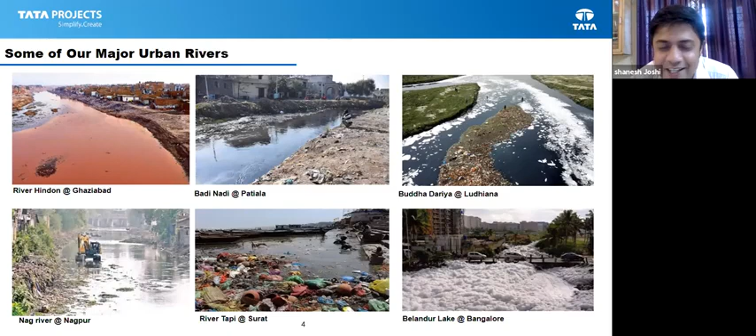Mind you, we have not put one photo of one river and just changed the titles. These are all different rivers, but yes, they are all the same in character, so they look all the same. They are full of solid waste dumps, heavily silted with sand and hyacinth. You can see a good amount of unorganized, undeveloped areas on the banks of rivers.

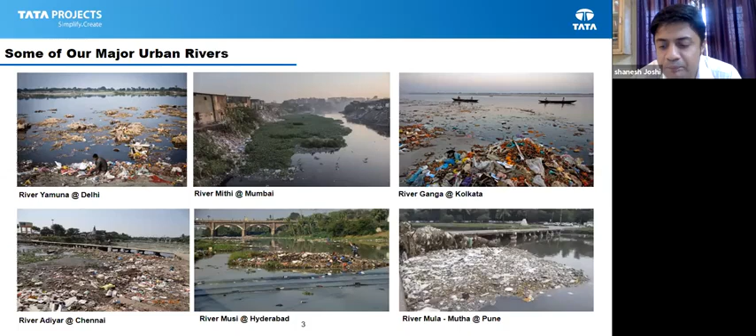So we have clearly not managed our rivers very well in the country. And this is high time we should give due attention to these, because there are major risks that we are carrying today in our lives. The most important risk is the pollution of surface water and groundwater. When we are dumping so much solid waste, or not managing wastewater properly, a lot of industrial and domestic wastewater without treatment is going into these rivers.

Definitely, we are creating very harmful, unhygienic conditions. We are prone to waterborne diseases, because this water, not only surface water, but it trickles down into the groundwater and spoils the clean groundwater. Then these are typically mosquito breeding fields, so you will suddenly see a surge of dengue and malaria in urban centers quite often whenever it rains and the water stagnates. So it's a major risk.

The second risk is of flooding. I come from Hyderabad, I'm based out of Hyderabad, and the last 10 to 15 days were really horrible. We saw a very concerning situation because the rainfall happened - it was not very heavy, it was moderate rainfall I would say. But still we had so much issue because the Musi River is fully encroached. There is no buffer zone left, and the water could not actually pass through the river, and the entire city was flooded.

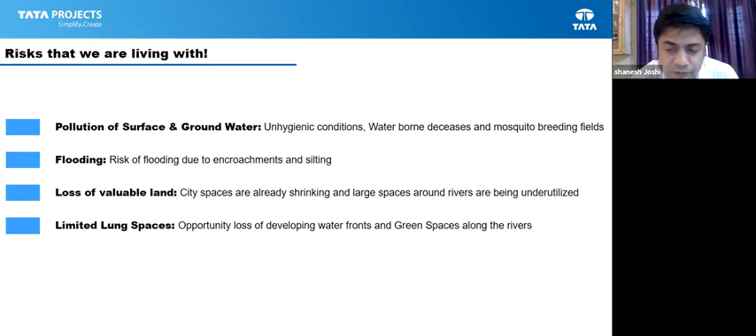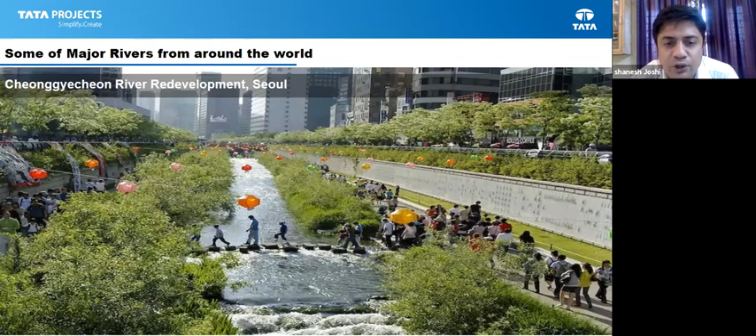As I was saying, when we entered into the environment business, we realized it's time that we should, as Tatas, which is a very socially oriented group where we look after the social needs and try to address them, we realized we need to have our urban rivers go through a major transformation. We actually started working on developing rivers around the country. We identified several rivers, and got very good support from the government of Rajasthan and the central government, who accepted that we were willing to take up this challenge of transforming a nala into a river, and they supported us.

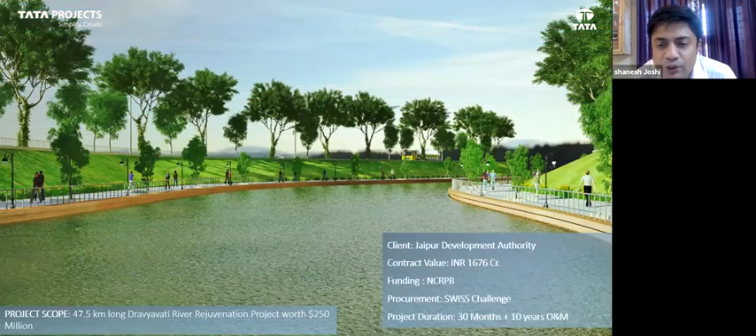The development agency was Jaipur Development Authority. The total cost of this project was 1,676 crores. It was funded by the National Capital Region Planning Board, a central government entity which funds such unique projects. The entire project was completed in 30 months. We started in March 2016, and on 2nd October 2018, this project was inaugurated for the public.

After flowing for about 47 kilometers, it meets a river called Dhund River. Now ironically, you would have heard about the Namami Gange program, where we are trying to rejuvenate our holy river Ganga. You would be surprised - we are miles away in Jaipur, very far from Ganga, but this project actually also helped in cleaning Ganga.

How? I would tell you - this is a tributary of Dhund River. So water from this goes into Dhund. From Dhund it goes into another river, from there to Chambal. Chambal goes into Yamuna, and Yamuna finally ends up in Ganga. So our small effort of creating a good water body here in Jaipur has also benefited River Ganga.

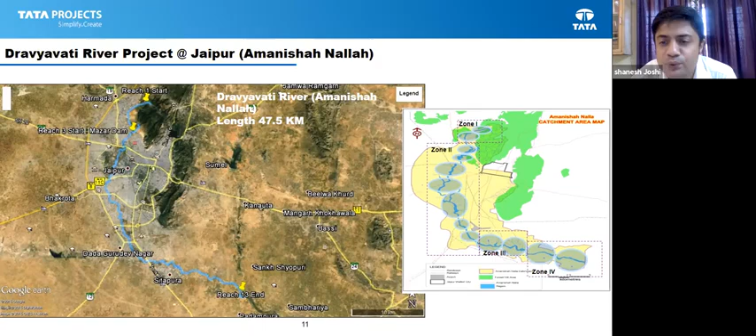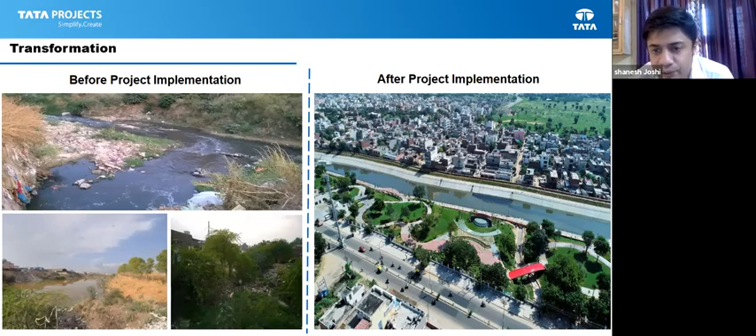What we have done is channelize the river. When you channelize it and maintain it well, you get a good amount of land that comes out of it, where you can plan either public space or commercial space. You can see very beautiful parks have been created - there are walkways, cycle tracks, open air theaters and more. Almost 72 hectares of land has been reclaimed, which they have now started monetizing. They are going to sell this land for commercial purposes, and I'll show you some economics of doing this project in subsequent slides.

It was a very uphill task, not easy, because whatever we have done to our rivers, it's going to take a lot more to bring it back to its original form. A huge amount of concreting was done. We don't normally recommend concreting, but this was necessary because Jaipur has flash floods, and to manage that velocity of water we had to line this channel in certain sections. It's not completely concrete lined - somewhere it's natural, somewhere stone pitched, but wherever there was a velocity or flooding issue, we had to line it.

Almost 99 lakh cubic meters of earthwork was done, 17,000 trees were planted, and 2 lakh 16,000 square meters of grass turfing. So a lot of work has gone into bringing this river back to its original form, and obviously a lot of money was spent.

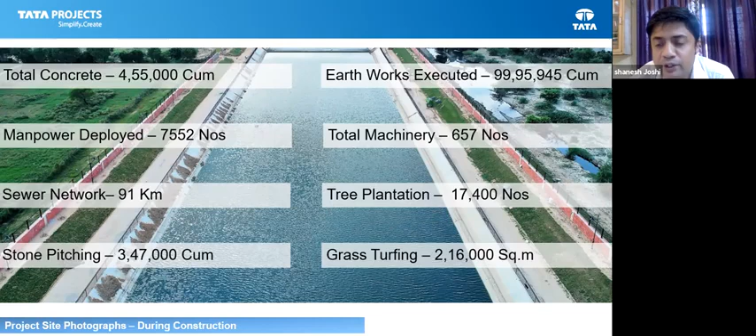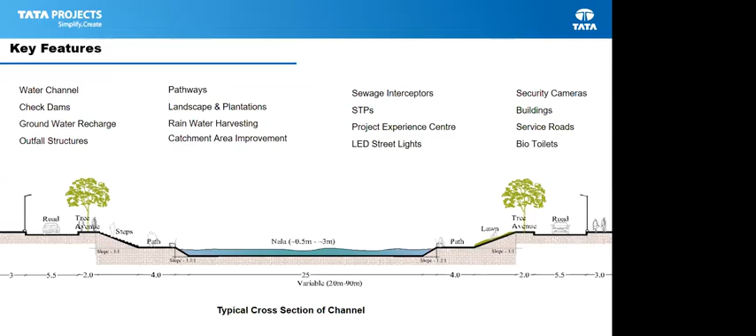Key features - what we envisaged at that point of time was to have good public space. With a 47-kilometer length of right of way, it gives ample opportunity to create pathways, walking tracks, cycle tracks. We also had sewage treatment plants, because we needed very clean water going into these rivers. We'll talk more about all the features that have gone into the project when Mr. Santosh takes us through that.

Some of these pictures are a bit old, but I think we can see how this entire space has transformed.

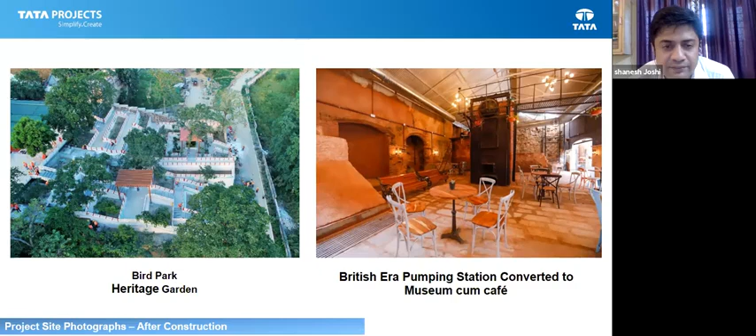While we were working on it, we found a British era pumping station which was not even noticed before. We have created a beautiful museum out of it, and there is a cafe that has been built. A lot of people come and visit this cafe now. There is a bird park, there is a heritage garden, so a good amount of green space, since Jaipur is typically desert, people are not really used to seeing so much water and greenery there.

But now, I think with this project, the entire skyline and landscape of Jaipur city has changed. We have also constructed a project experience center. So those who happen to visit Jaipur, I would definitely recommend you please visit the project experience center.

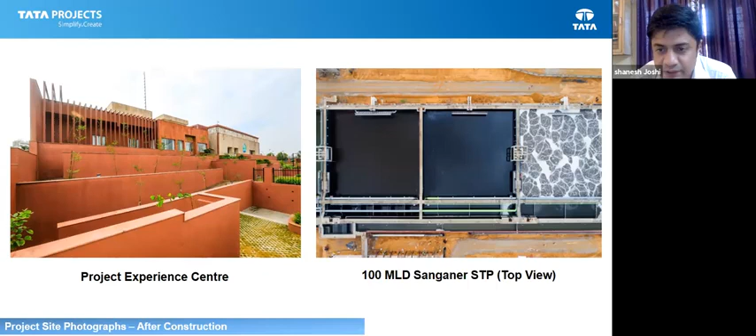You will get to understand how this project was conceptualized and delivered. We got a lot of appreciation. Our honorable Prime Minister has congratulated us. Our Vice President has taken an aerial view of when this was being developed. We have got several awards.

So this is typically a people's project. I think for any such project, because we are the ones who have actually spoiled these rivers, we should take accountability individually. Each one of us should take accountability that yes, we have spoiled the rivers, and we should again take responsibility of cleaning it.

So all these projects are people's projects. We have gone through this people cycle very well in the last 4-5 years, where we had stakeholder engagement, people engagement. We told them why this project is important and why it should be done, how they are going to benefit. We organized school picnics, and a lot of students, young minds came and saw the experience center. They realized, yes, we have not done the correct thing, and it's time that we should correct it. They were actually very happy to be part of this particular project.

So what was the value that has been created? The first and foremost is health. We have improved air, water, and land quality by doing this project, which is going to benefit not only the river area, but the entire river zone and the people staying in and around that zone.

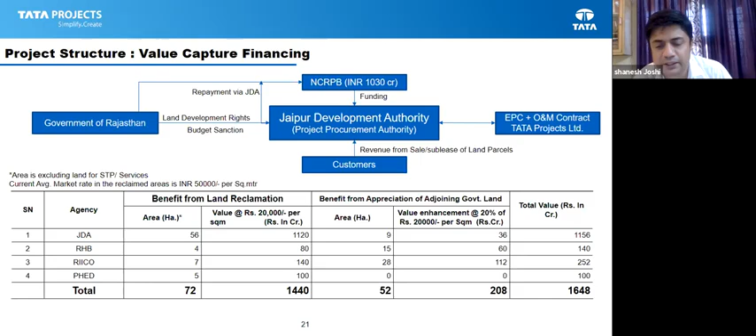Even with conservative numbers, such a project, once fully developed, can contribute to paying back all the loans that governments would be willing to take. So it's a very healthy river hygiene project, and I think we should all be proud of it. Since we have worked on this, we have learned the tricks of the trade, and we have understood how this can be done.

Sabarmati was a project done in Gujarat, which I think you all would be familiar with. It was very rightfully highlighted by our Honorable Prime Minister. But typically, I would say that is a river development project, not a river rejuvenation project, because they had a good source of water from Narmada, and they wanted to transfer that water into their irrigation channels. So they used Sabarmati as the water channel. They had a good source of clean water with them, and managed to do development around those areas very nicely.

But if we talk about river rejuvenation, this is what and how it needs to be done. So I think I have covered the points I had to share with you all. I hope this has given you a perspective of how these rivers are important in our lives, and how each one of us can contribute in developing these rivers.

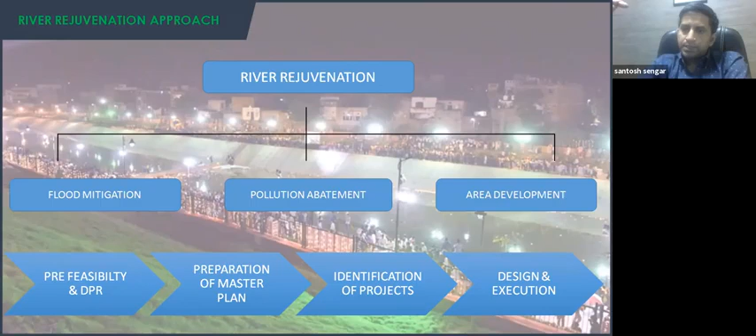In terms of how we go about the whole river rejuvenation process: first is pre-feasibility and detailed project report, the DPR. After the DPR is formed, we prepare the master plan. Once the master plan is prepared, we identify certain projects for execution, then design and execute those projects. I'll explain the Dravyavati river project to show how we go about river rejuvenation, which we've subsequently done for many other rivers.

To understand the Dravyavati project, we need to understand how this river was closely. As Mr. Shanesh told, this river was historically known as Dravyavati, but later the Dargah of Amanishah was established during the Mughal period on the northern edge of this water stream. During that period, Jaipur was a very small fortified town located west of this water stream. Since then, people started calling it Amanishah Nallah, and eventually it turned into a Nala with a very degraded state.

It had lots of sewage flowing into it, solid waste was deposited all around the river - generally a degenerated ecological environment. There was slumming along the edges, encroachment at many places where there was hardly enough space for that water to flow out. The length of the river is quite huge, 47.5 kilometers, and the most important thing is that the gradient from start to end of the river was 150 meters. That's the reason concretization was done for the river, just to carry that flow, because the slopes were heavy - it was a major engineering challenge.

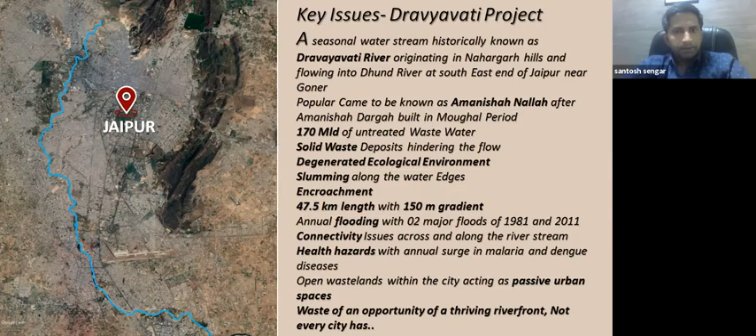I will not go into detail of pollution abatement, but I'll briefly describe. These are basically 3 or 4 parts. Not necessarily have we done all of it in this project, but gradually we have refined this process. The first part is screening of the solid waste, then we go for sewage interception and treatment through sewage treatment plants.

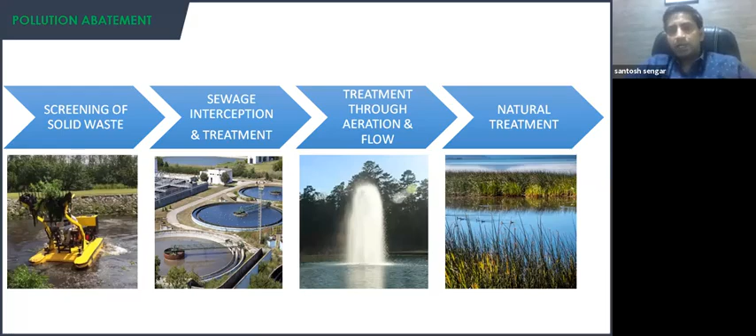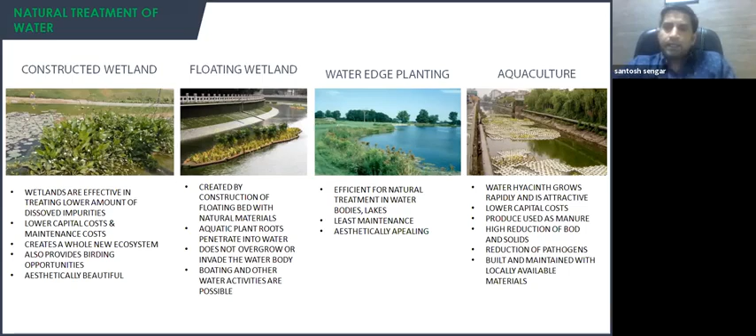There's an aeration technology where we create water fountains within the river stream for aeration of water. Then we can also go for natural treatment of water, like constructed wetlands, floating wetlands, water edge planting. We plant certain flora along the edges which will treat the water, and floating pods. In order to go ahead with this project, there were certain things we had.

We started with creating a vision, which was basically to create a vibrant and lively waterfront by complementing the character of the context, and by planning viable and attractive plazas and promenades to break the monotony of the stretch without affecting the hydraulics of the water body.

This vision carried everything when we started, and then we came out with certain objectives: to provide certain amenities and infrastructure like cycling infrastructure, creating public amenities like public toilets, creating a walkway, and connecting the greens located all along the river.

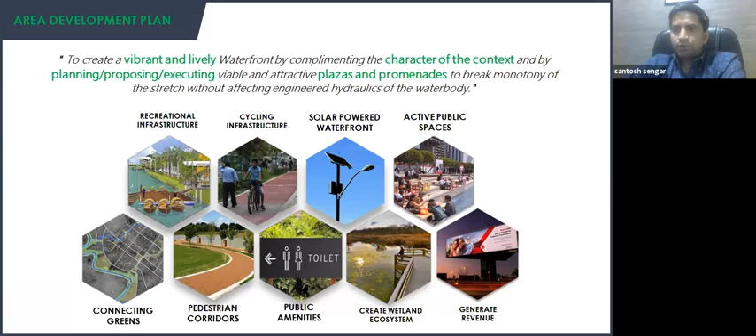In terms of explaining the whole project, I'll explain what were the major projects undertaken. The first part was the master planning of the project to begin with. A master plan for the whole project had to be prepared, which was a big challenge because the master plan for Jaipur was already in place, and in it this river was shown as a river zone without assigning any detailed land uses.

All the lands in the river zone were lying vacant because there were no development guidelines for those areas. Even if we do not talk about the river, those areas were lying vacant. So the first exercise in master planning was in terms of defining a project area.

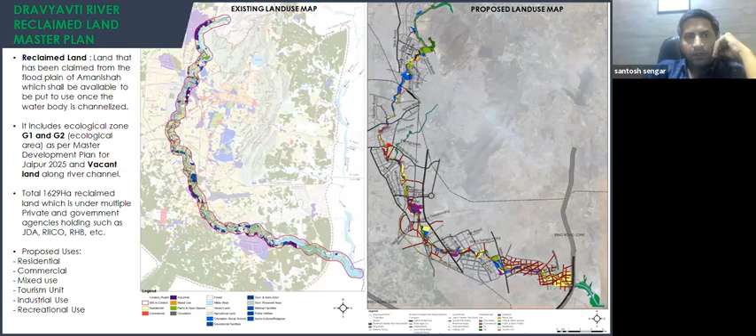When we talk about a river, it has a certain affected area or context area. To define that, we had to do certain exercises, so certain layers were taken into account. The first thing was the Geological Survey of India, from which we collected the river boundary.

The second layer was the master plan delineation of G1 and G2 areas, basically eco-sensitive areas marked by the master plan. Then there was a layer created of vacant land parcels and built-up areas.

Also, the vacant land parcels of government ownership lying immediately next to the river were taken into the project area. In case of river dams and all, where water was flooding beyond those areas, those areas were also taken into account. So that's how the project area was delineated.

On the left, you can see the basic components of the master plan which was prepared. First was the base map. Second was understanding the engineering aspects, which is very important. When doing a project like this, you need to understand the river hydraulics and the different activities proposed from the engineering point of view, and how they will come and affect your land uses.

First was the preparation of a conceptual plan. Then certain workshops were conducted for public involvement and all. Then a proposed land use mix was created, which we call the draft master plan. We'll not go into the details.

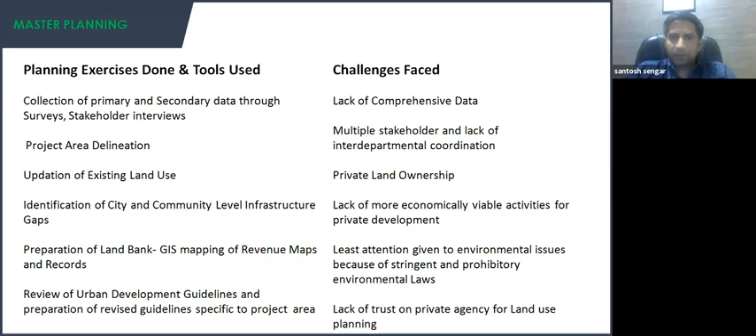Next, when a land use plan is prepared by a private agency, there is definitely a trust factor involved with the local body. So this is what we had faced during the master plan preparation. Though after the master plan, we had identified certain land uses, and we did the riverfront development.

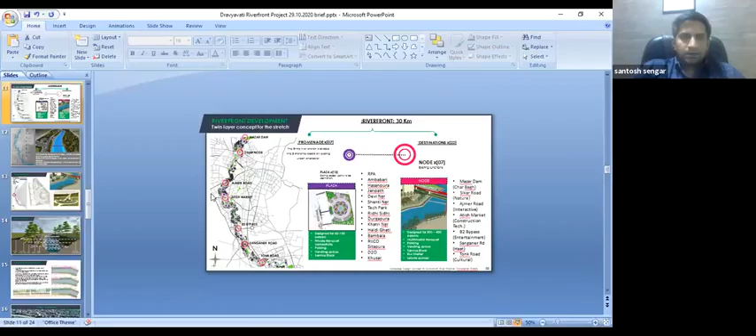So in the riverfront development of that 47.5 kilometer stretch, we identified 30 kilometers which was within the city limits as the riverfront development. And of that, we divided that stretch into certain destinations.

We had this long stretch which we had to design, and we wanted to break the monotony, so we decided to divide that whole stretch into promenade and destinations. By promenade we mean a linear stretch of river bank where facilities will be located, with cycle track and walkway, and there will be destinations which we have called nodes and plazas.

On the map on the left hand side, these are the locations of major nodes: Mazar Dam, Sikar Node, Ajmer Road, Atish Market, B2 Bypass, Sanganer Road, and Tonk Road.

In terms of explaining what these nodes and plazas are, if you're from an architecture background, in urban design there's a concept called a node where the urban character is changing. So we identified those areas where the urban character was changing, where a major transport node is available, transport connectivity is available, and places where people will access the river. Those points were called nodes.

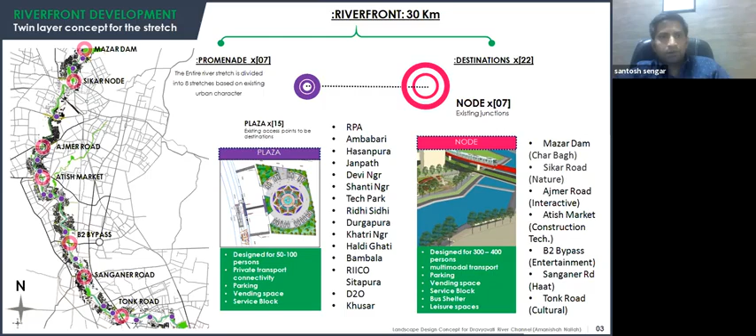In terms of giving them identities, this whole riverfront was designed and themed on celestial bodies.

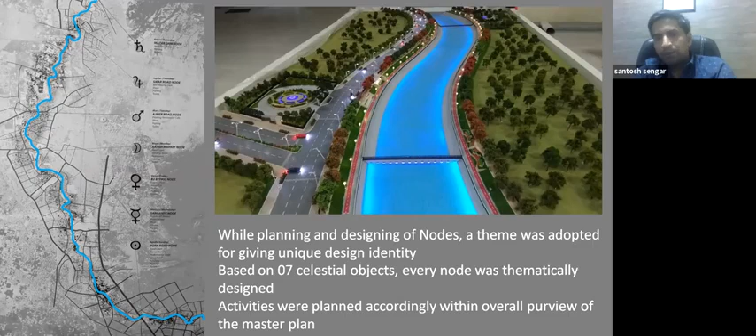This is one example of a node, which is Atish Market node. There were riverfront restaurants provided, a sundial was proposed, public toilets were proposed, and vending spaces were provided. This was located near a metro station where connectivity from all other places was provided, and a river crossing was provided.

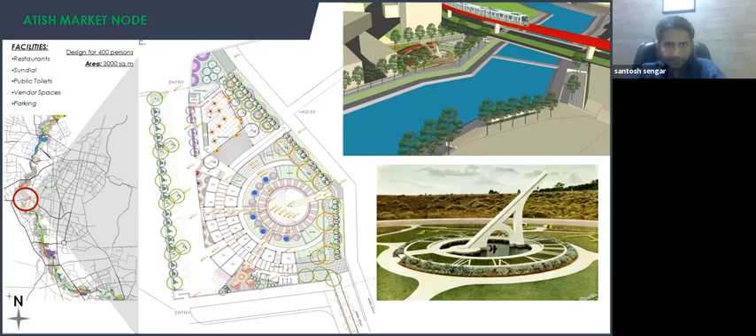In terms of explaining the typical river section, which I've called a promenade, it was designed keeping in mind the engineering aspects of the river design, the hydraulics. This is one typical section, not necessarily the only section for the riverfront development, but this is designed for different flood levels.

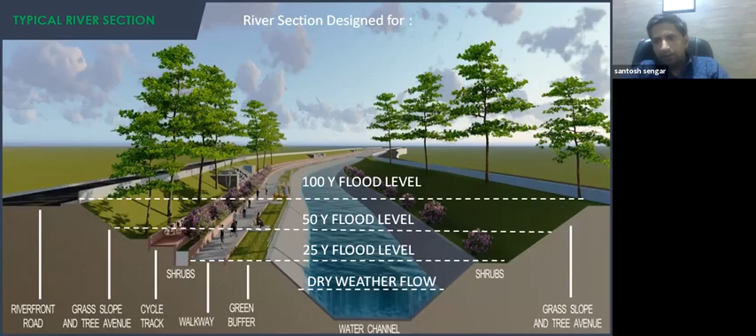All your amenities like sit-outs, toilets, and so on are provided at the 50-year flood level within the river right of way.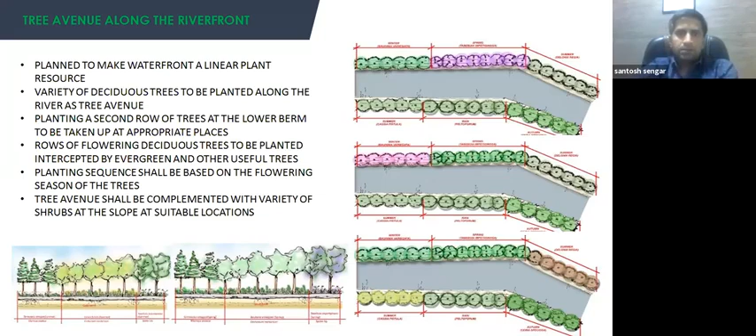In terms of the tree avenue, which is the plantation of trees all along the river edge, it was planned as a linear plant resource where a variety of different trees were provided, and there was a pattern where flowering was arranged in a manner so that at every point of time there will be flowering in a certain stretch along the water edge.

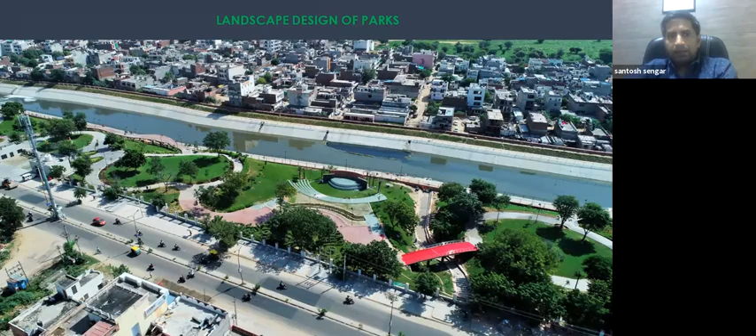So I'll go for the landscape design of different parks. There were three major city-level parks designed within the project. One of them was the bird park, the Sikar Road Bird Park. This site was basically the site of an old dam created in 1853.

There was a broken wall, and there was a small wetland located just off the Amanisha Nala. The idea was to create a space to conserve that wetland where we can go out for natural activities. Bird watching decks were created. This was the place where a colonial period pump house was located, which was identified and restored as a waterworks museum and cafe.

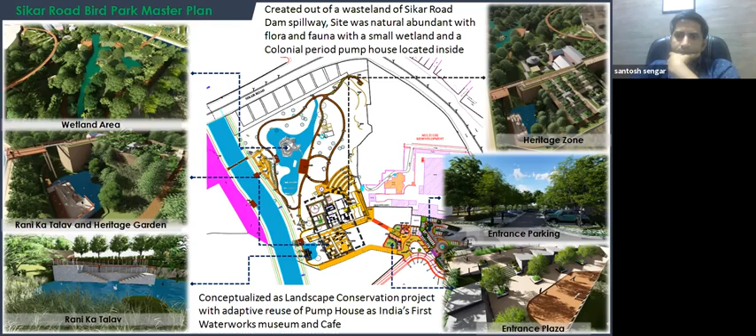Within this project, a wetland area was designed. A recreational water pool was designed, called Rani Ka Talav, to relate it to the general public. And these are the entry areas and parking. So there's a 3D view of that park.

Second was the botanical garden. In terms of explaining why this theme was given to the park, there's a city-level park themed as a botanical garden.

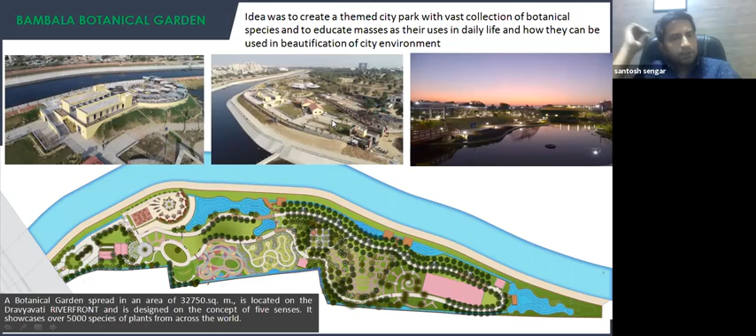These are different pictures. On the top left, there's the cafe provided within the park, and one aerial view. These are pictures from when it was under construction. If you go today, it looks even more beautiful.

Next is the project experience center. This was one important component of the project in terms of public participation, because around 50% of the land was in private ownership, and land acquisition was not possible.

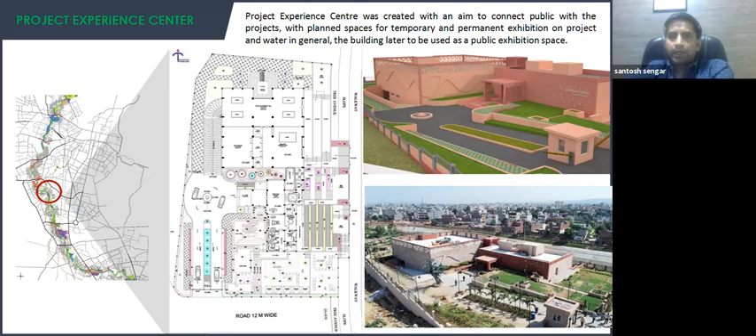The Land Acquisition Act 2013 was still on hold, so land acquisition was not possible. In terms of getting this project executed, we had to convince the general public of the importance of the project. So the Project Experience Center, PEC, was planned in order to educate people on how this project would help the city or the general masses, and it actually helped people understand why this project is so important. Here's the picture of this Project Experience Center building.

A model was created for Jaipur city in context of the Dravyavati river, so that people living along the river could go and identify their houses with reference to the river. A detailed map of Jaipur city was created, which is still there in the project experience center.

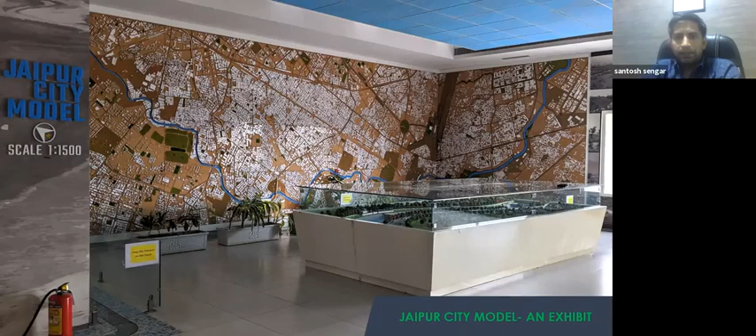By explaining all these slides, this was an exercise that had different aspects - urban planning, landscape design, urban design involved. We had to do a lot of work, from land use planning down to the details of the project experience center design. It involved a different approach.

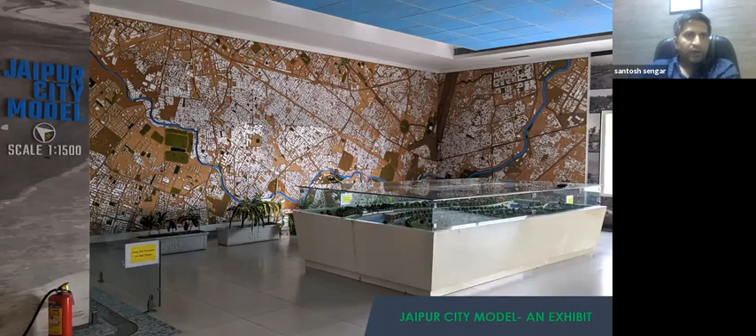To conclude, I'll talk about what lessons we learned for riverfront approach. First, in planning, we need to consider a nature-first approach. For example, when master plans are prepared, rivers and water bodies are generally marked as eco-sensitive areas, but further detailing is not done. We need to take them on priority while planning.

We need to change our approach from socio-economic to socio-natural. When we do our planning, we consider a lot of socio-economic aspects, but we need to shift from economic to natural aspects. We need to conserve our water bodies and natural resources in the long term.

We need to have more public participation in the projects. For example, for Jaipur, we were lucky that this project was executed despite having so much private stake, but for such projects to be successful, we need more public participation.

Greening the neighborhoods - by greening the neighborhood, we need to connect all cross linkages of green spaces. In this project, we tried to create a linear green spine through the city, but we can also try to connect green spaces located across the rivers. In this particular project, we did river channelization.

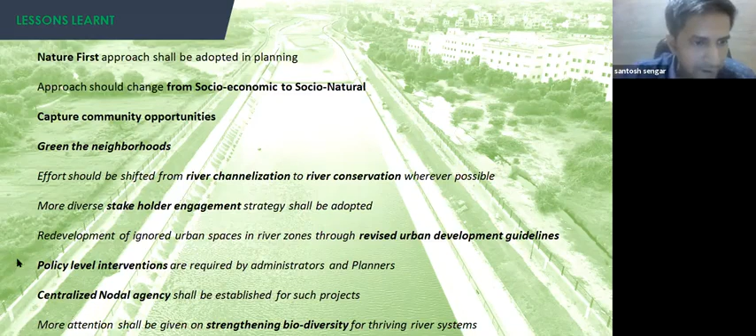Thank you, Santosh, for giving that wonderful insight on the planning part. I'm feeling a little bit thirsty, so I'm having trouble speaking. I'll just get some water.

The biggest lesson that we have learned is that while this seems to be an engineering project—I'm an engineer by profession, and we always thought these are engineering projects where we are talking about hydrology, treatment, getting clean water, etc.—I think these projects are very important from an architecture and planning point of view. I think that is how the need is established.

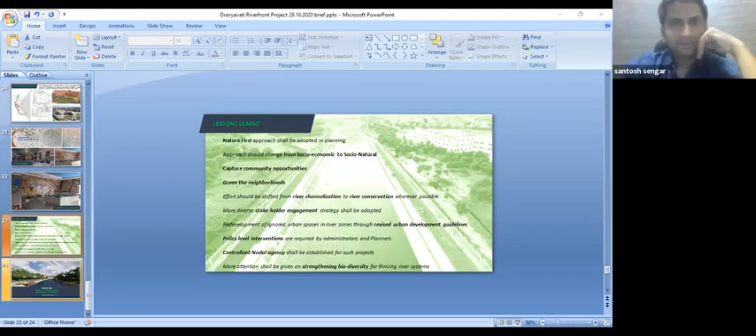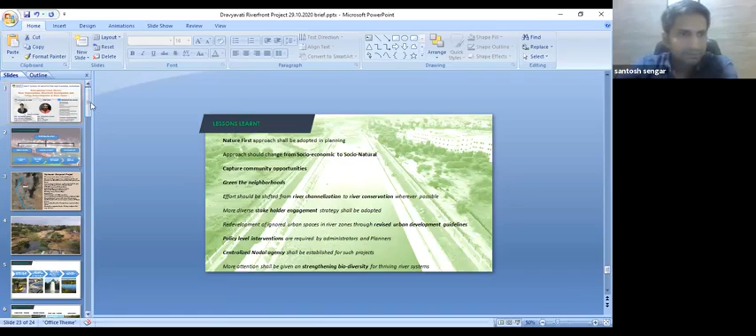Of course, engineering, architecture and urban planning have to go hand in hand. You can't just have one and ignore the others; you have to work like a team to create a project. This is the lesson we have learned, that there are many planning aspects, which Mr. Santosh has also explained in detail, of how planning of these river zones is going to change and transform the entire city. So I think we have a good opportunity.

I think we are a country of opportunity at this stage. All the Western and European countries are coming to India because they see it as an opportunity to do something that we have not done for so many years. So I think the biggest learning is that it's time we should start taking these rivers as part of our lives—whether we are staying close to them or not, we are getting affected.

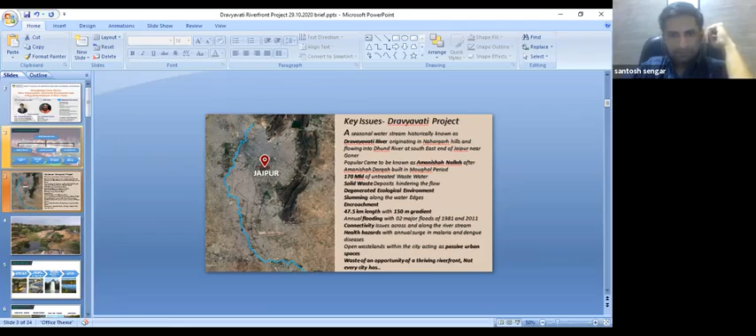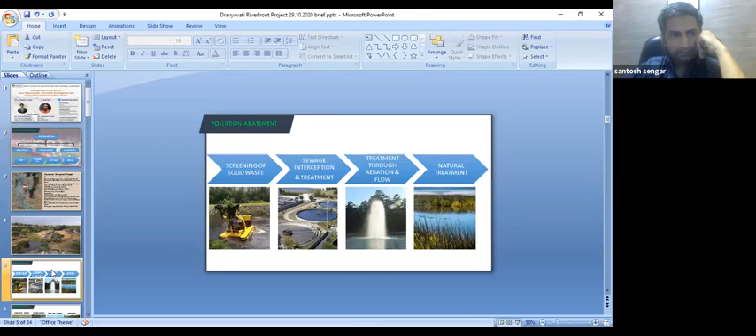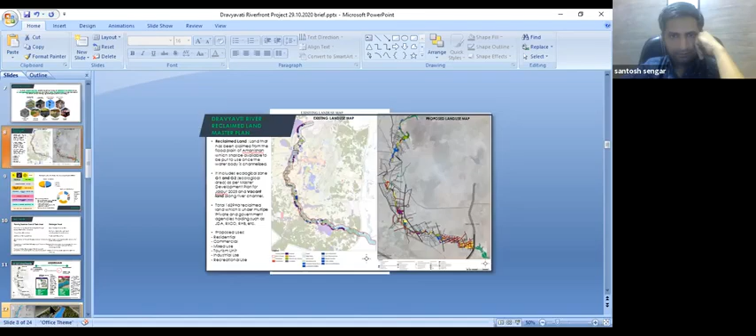All the young urban planners and architects listening to us have a major role to play, because you are going to be part of many development corporations, consultants, or some of you will start your own ventures. So wherever you go, if you have a good policy framework getting institutionalized as we move along, when you graduate or postgraduate and come out in the market, you will have an ocean of opportunity here.

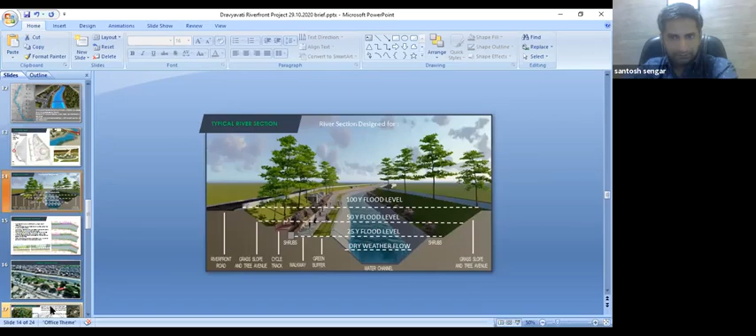We look forward to all of you contributing your piece of mind, information and knowledge in this, so that we have very beautiful urban centers in the country. I think that's all from our side. If you have any questions, thank you.

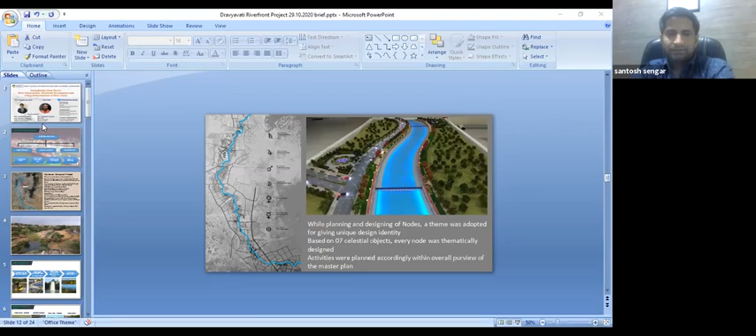My first question is, it's been observed that riverfront development is done keeping in mind the rejuvenation of the river, to protect it from further pollution and to create a recreational area around it. But it's often observed that it further leads to creating more pollution after the development. Okay, so I'll go for that, Santosh.

It does not happen because we have not managed our rivers well. I think whoever asked that question is getting at this: when you have a good river, then you have so much development, more population, more water consumption, and more solid waste coming into the vicinity of the river.

Yes, there is that risk, but think about what we do when we plan such projects. For example, when we planned this particular project, we planned for all the developments that are going to happen over the next 30 years. We did population projections, seeing what kind of population is going to come into that area, and thereby how much more wastewater is going to get generated and what kind of industries would come, so we plan for effluent treatment plants.

More solid waste is going to get generated in that area, so you need larger capacity waste management. All these aspects are taken into consideration when planning, and we typically plan for a 30 to 40 year horizon. So if we don't manage our infrastructure well, yes, possibly we will do some more damage. But that is not the intention. The intention is to create infrastructure planned for the next 30 to 40 years so that it is protected.